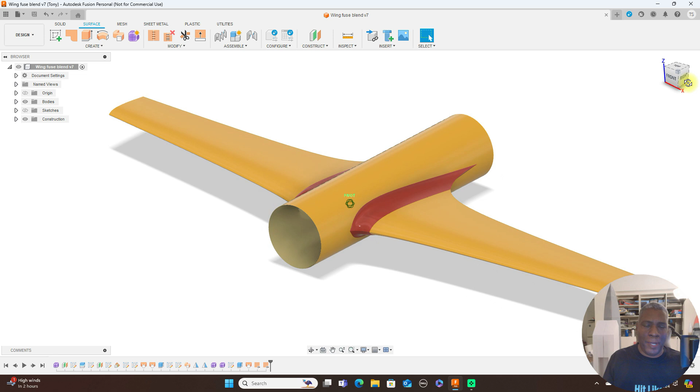Today we're going to be looking at a simple way of making these wing fairings, or how this mates the wings into the fuselage smoothly. The transition, as you can see, the wing comes up and transitions right into that same shape. It's somewhat like a fillet, but it's not a fillet. There are many ways of doing this, but this is probably the easiest way I've seen. As you can see, this looks very nice, the way they butt up like that, the wings to the fuselage.

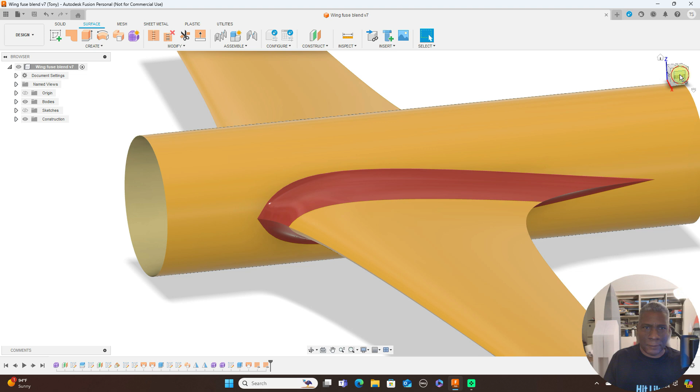Okay, let's go ahead and get started on this. First I'm going to do a new design, and make a mock fuselage here, using a cylinder on this plane.

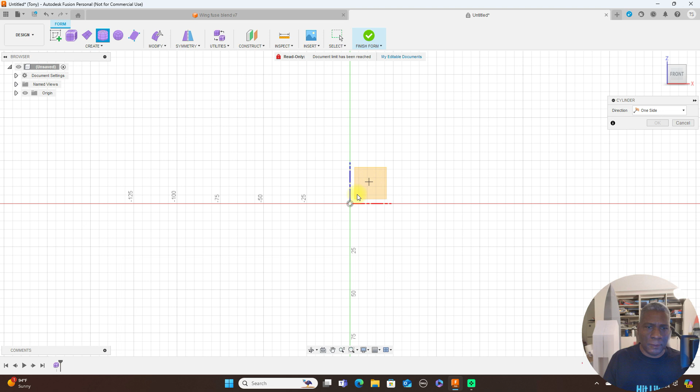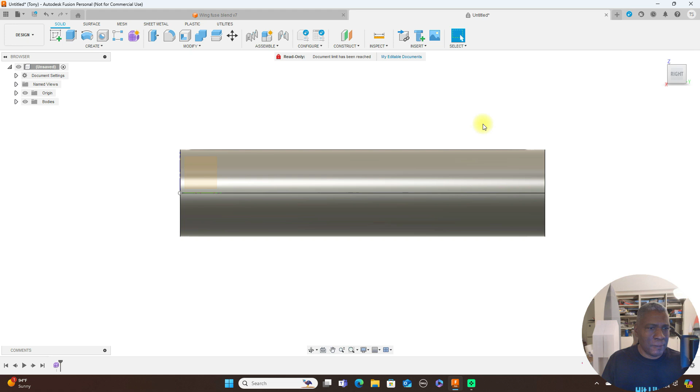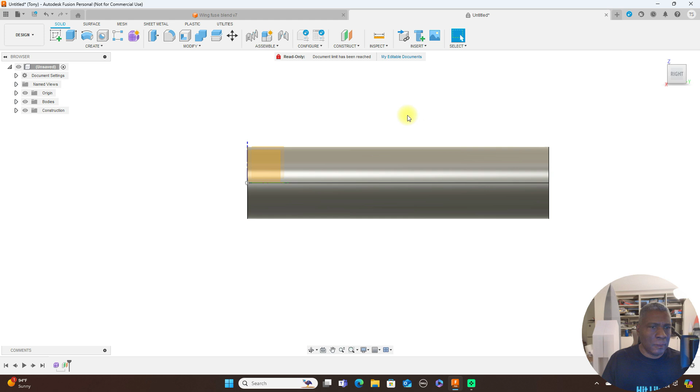Okay, we have our so-called fuselage here. Now I'm going to do an offset plane, and click OK. I want to create a sketch on this plane, so I click that plane and create sketch.

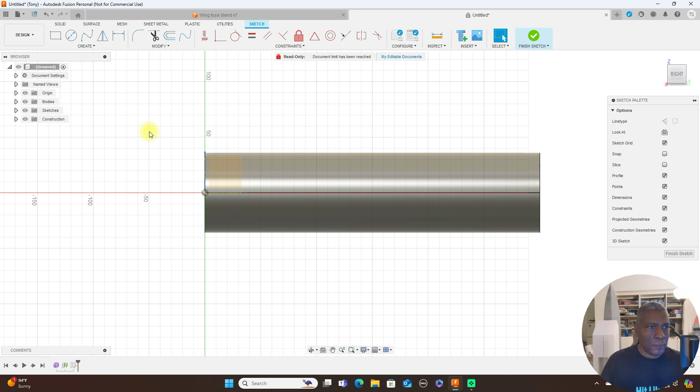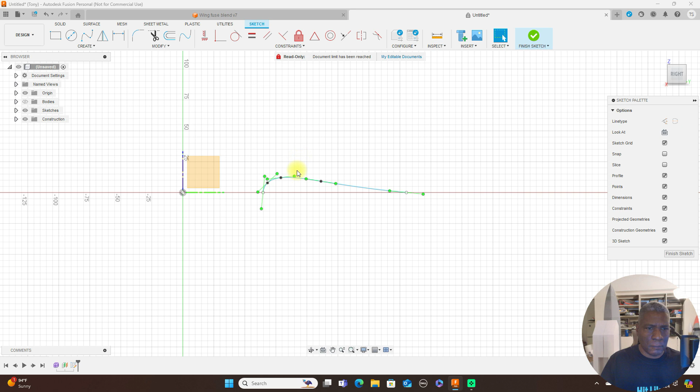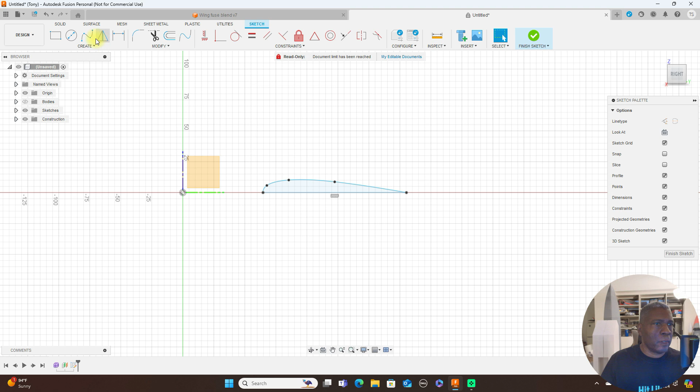Now I'm going to draw an arbitrary airfoil. If you have an airfoil that you want to use, you would just put it on the canvas onto this plane and then trace it. But here's just an arbitrary one. Okay, and just mirror this, click OK and finish sketch. That's our arbitrary airfoil there.

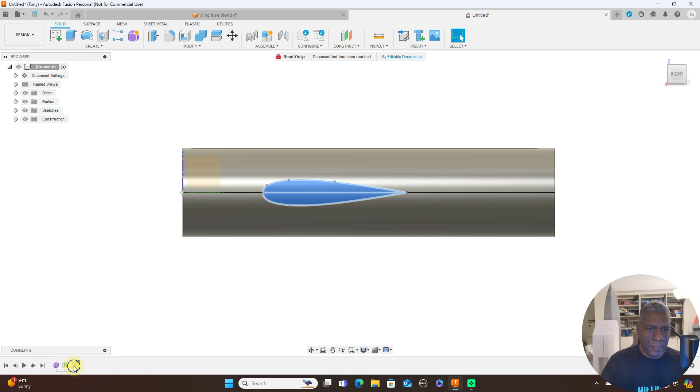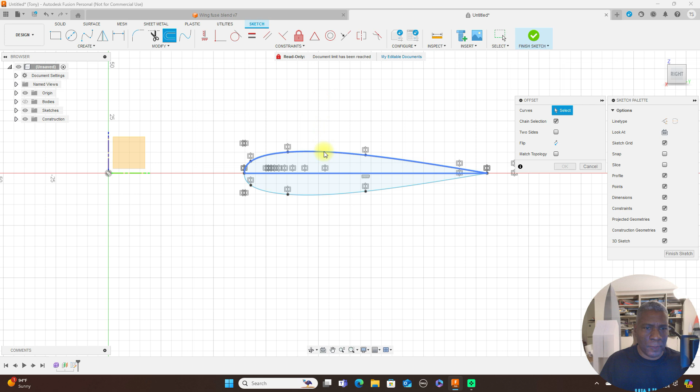What I'm going to do now is come back and edit this sketch, turn this body off again. So once you draw the airfoil, just leave the sketch open. Then I'm going to use an offset, but first I'll delete this line here, then use an offset.

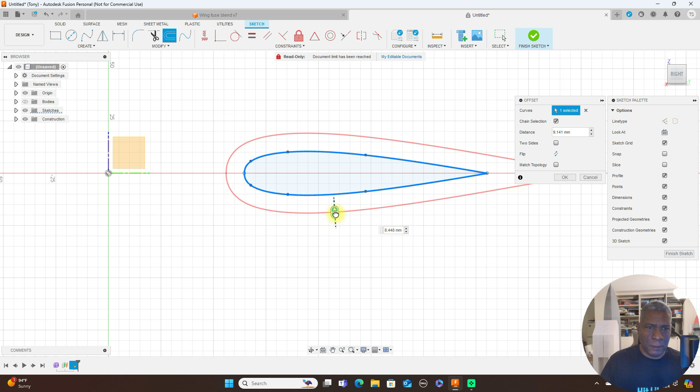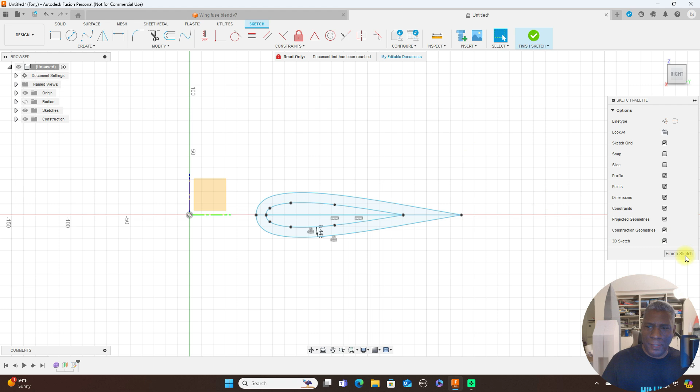This and this. Make that bigger and click OK. I can put my line back if I want. Okay, now we have that, go ahead and finish sketch, and turn the body back on.

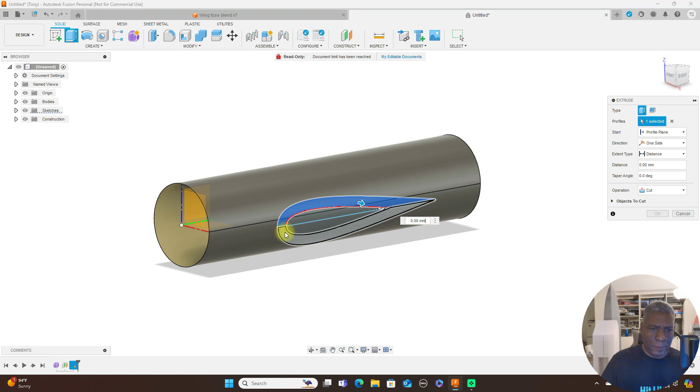Now I'm going to use extrude, and extrude cut. I want to use this profile and this profile. Drag that in, and click OK.

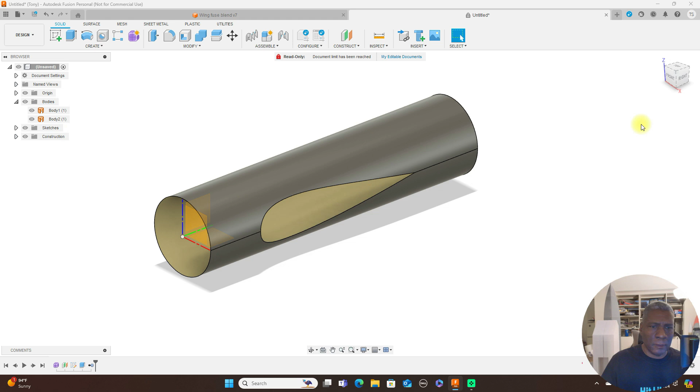And this here, just remove it, and this other one over here, remove it as well. You don't want to delete them because you might want to come back and use those pieces again for something. If you use remove, it just removes it from the tree up here, and if you want to bring them back, just come down here. Okay, turn the sketches back on that I need to see.

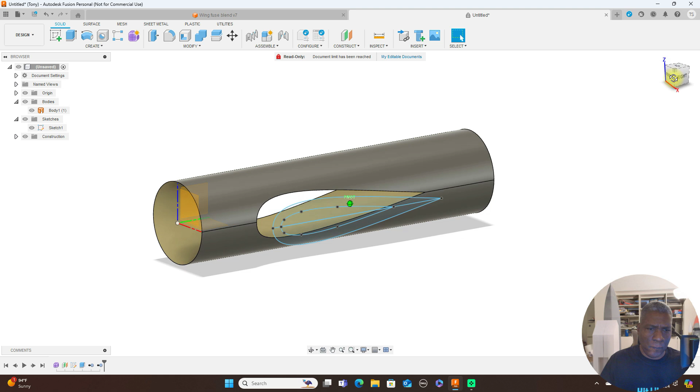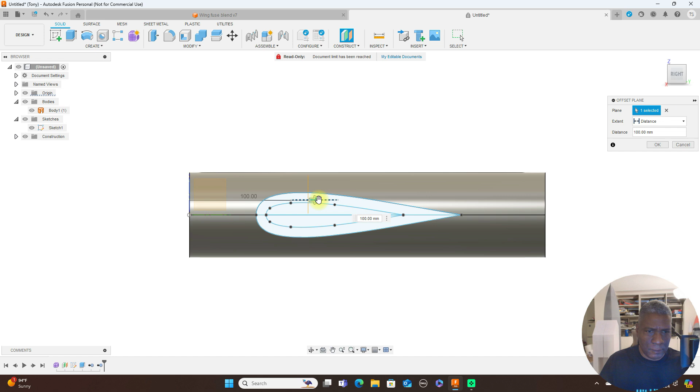Now, you don't have to do this, but I like doing it because sometimes when I try to use my fit point spline, it gets all wonky. So I like to do this: use an offset plane, and click OK.

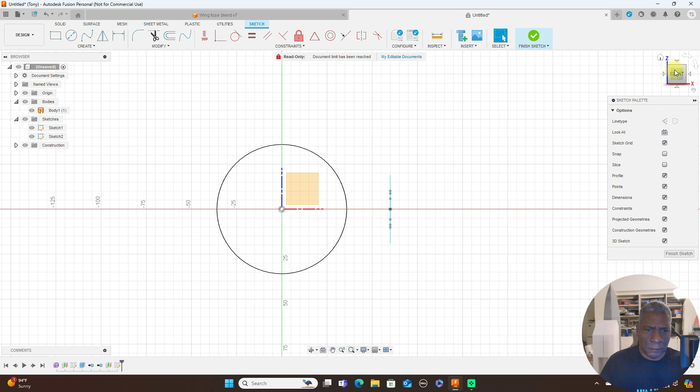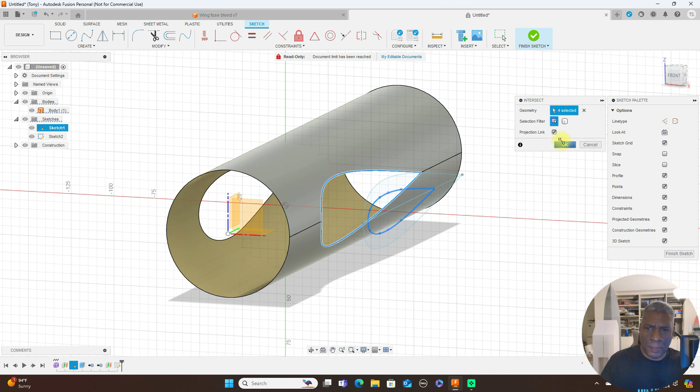I want to create a sketch on this plane here, and create sketch. Intersect, and the geometry I want to intersect is this, and click OK. Now we have our points here.

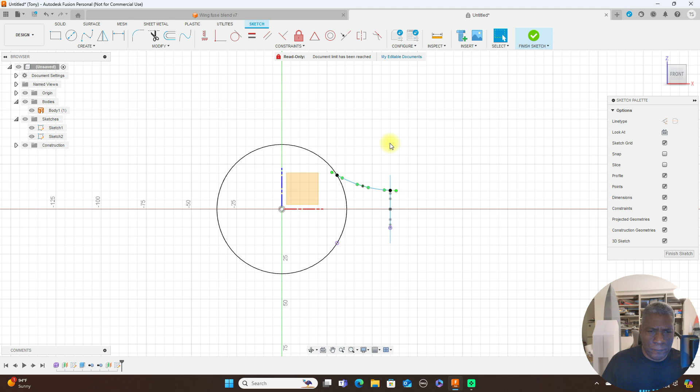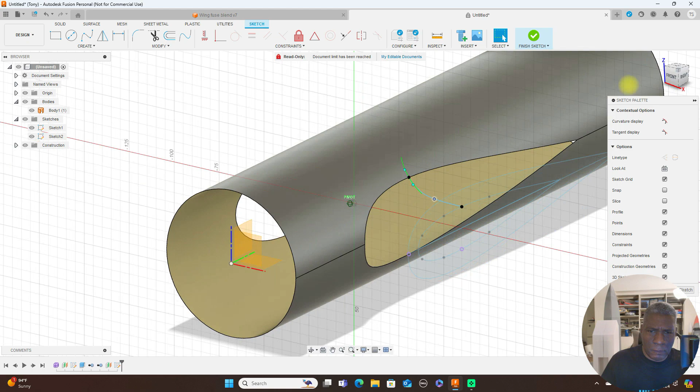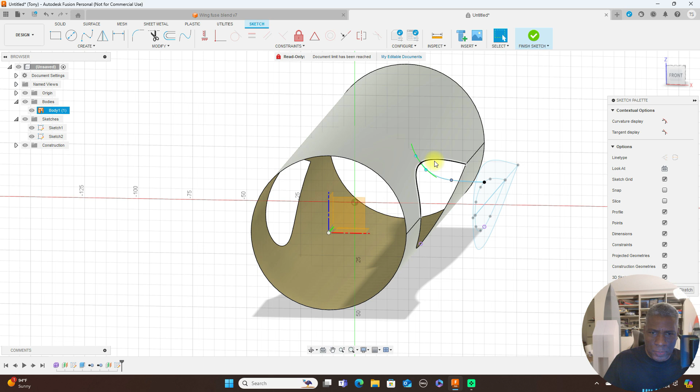Now, fit point spline, snap it there. This just adds a control point here for this curve. When you loft these two together, this profile with this profile, you can make it a G0, G1, or G2. By putting this control point in here, you have a little control over it, but like I said, you really don't have to do this, it's up to you.

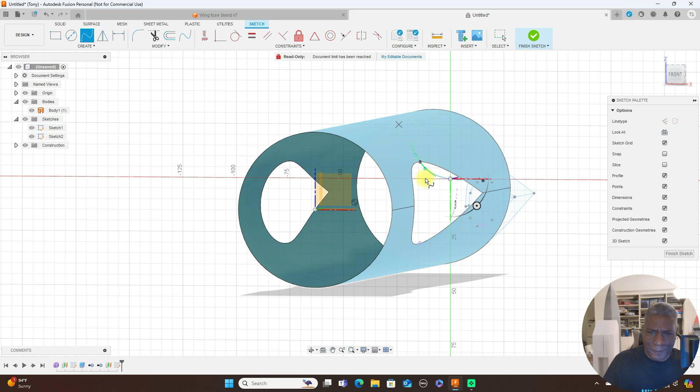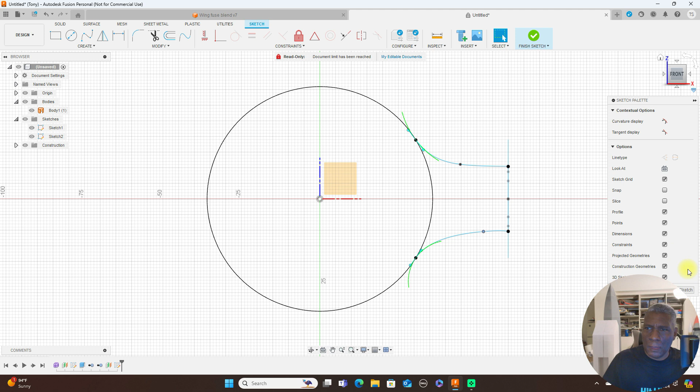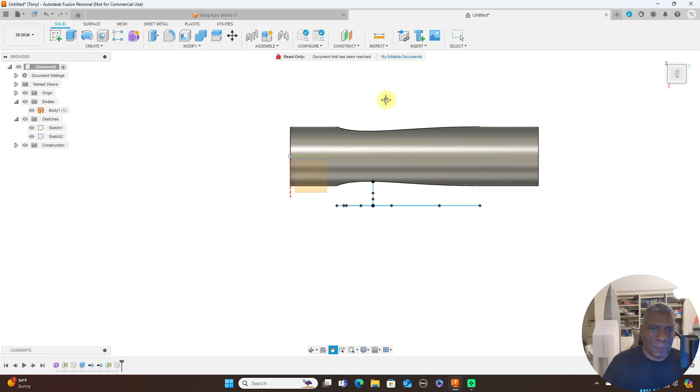Get this from the front again. Go ahead, finish sketch. Look at this from the top. Now I want to create a sketch on this plane.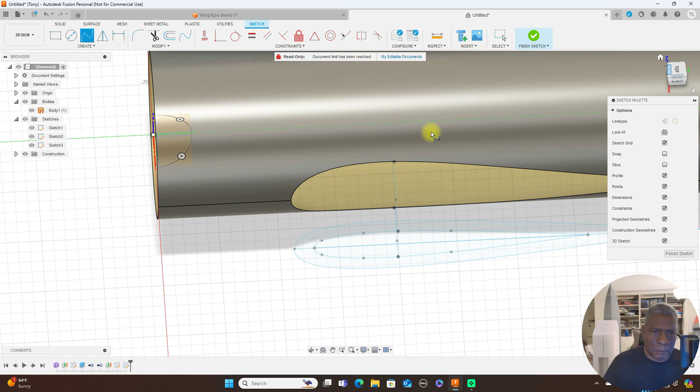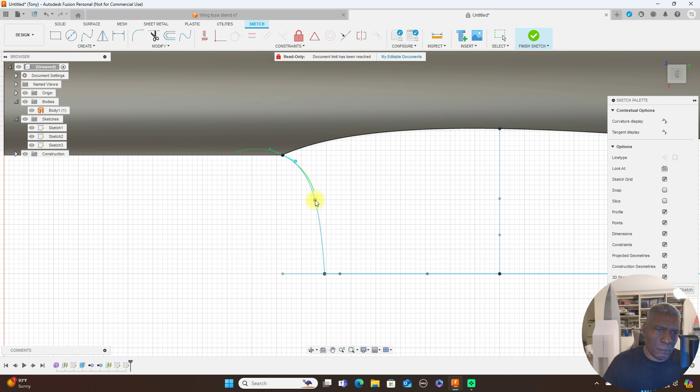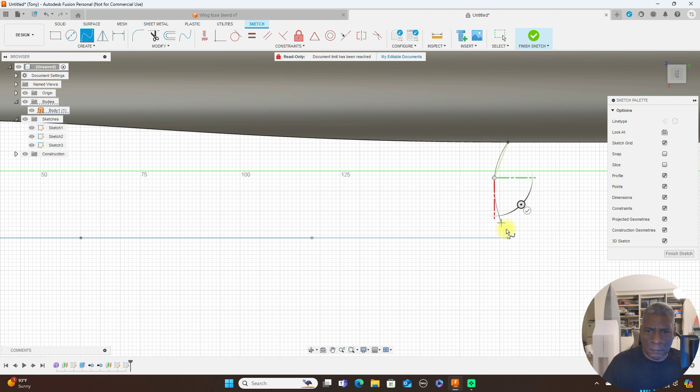Fit point spline. Okay, you can do that. Then the back here. And that's probably on the wrong line, which it is, so I'll delete this and do that again, making sure to get it on the right line.

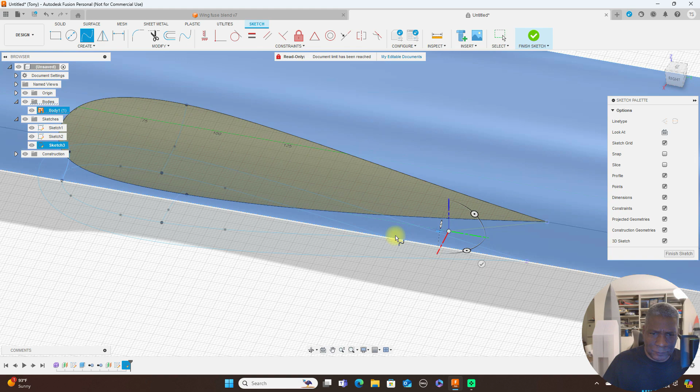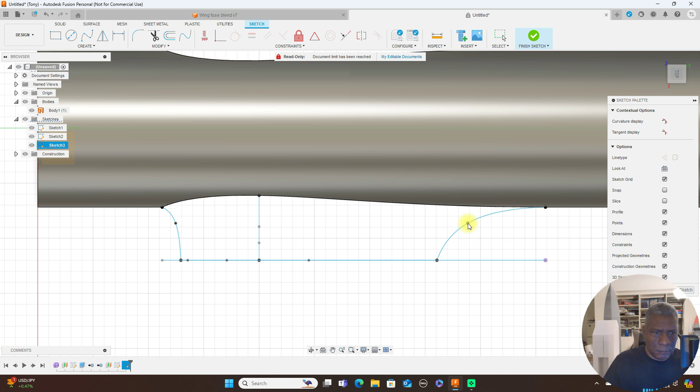Look at this from the top. It locked onto there, let's unlock that, then move this down. Go ahead and finish sketch.

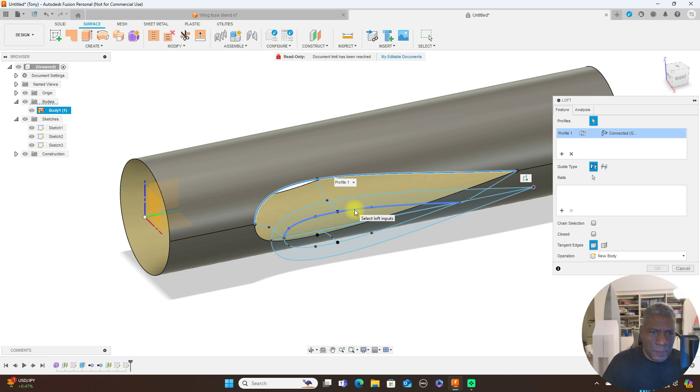Then surface, and we're going to loft, this to this. Then we can add our guide rails.

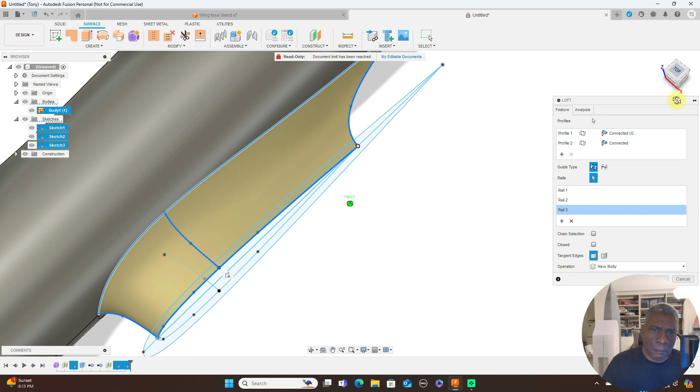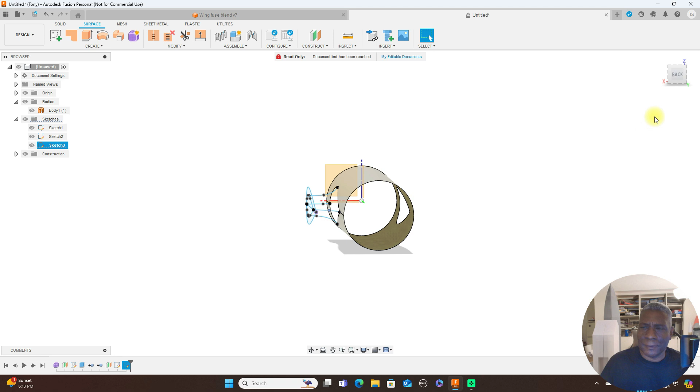Go ahead and cancel this for a second. As you can see, that back is not up, so I'll just move this up. And we have that. Now I'll do that again.

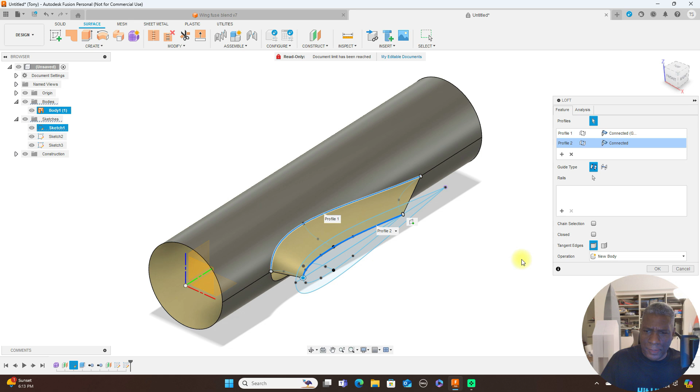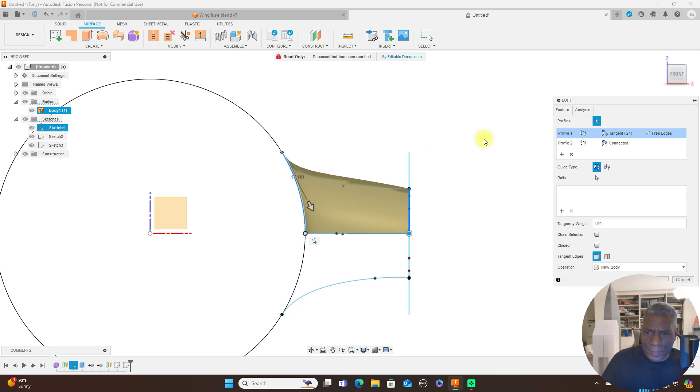Now let's just say we lofted this line to this line and didn't use any guide rails, we just did that. Now you see here how this goes into here. Now that's G1 there, how that runs into there like that. And if you can see, when I drew this line here, that's somewhat of a G1 line that I control, but this is a G1 curve here and blends into here.

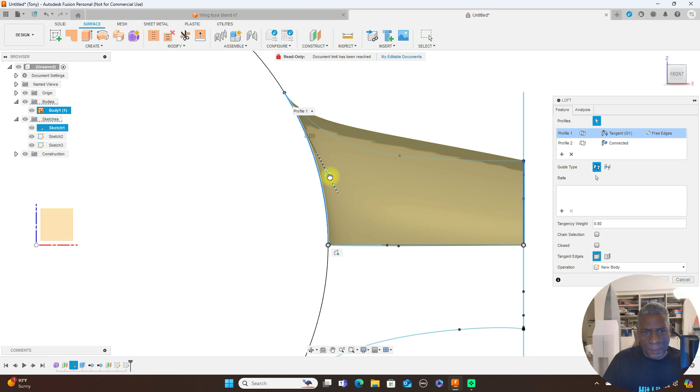So this is what you want, this G1 right here. So if you didn't draw this guide rail in here like I did, you could still get decent results using that, like this. And that's good too, as you can see. There's nothing wrong with doing it that way too.

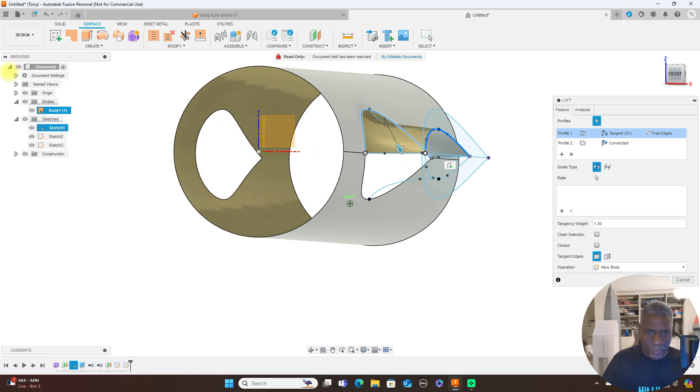Like I said before, you didn't have to put the guide rails in here, but I just like putting guide rails in to get more control. Now I'll go ahead and click OK here, and then we loft the bottom of it also, so this to this.

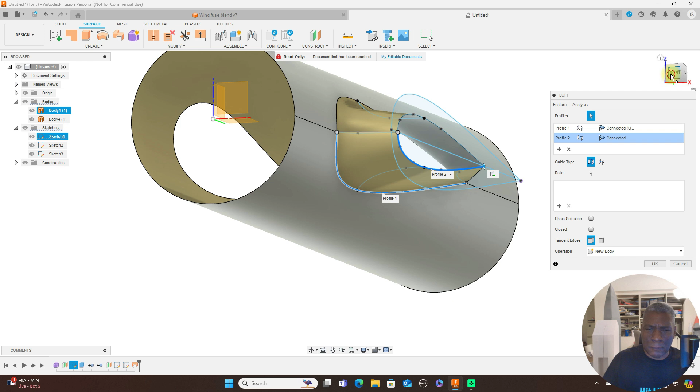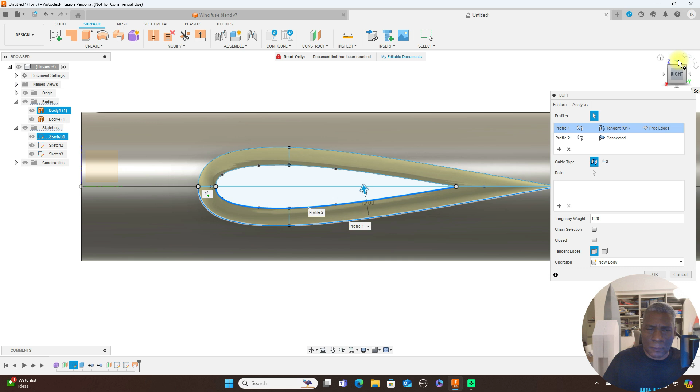And what we want to do here, give it that G1 also. And then you adjust it. Go ahead and click OK. Turn these sketches off. And there you have that nice blend in there like that. And this is G1.

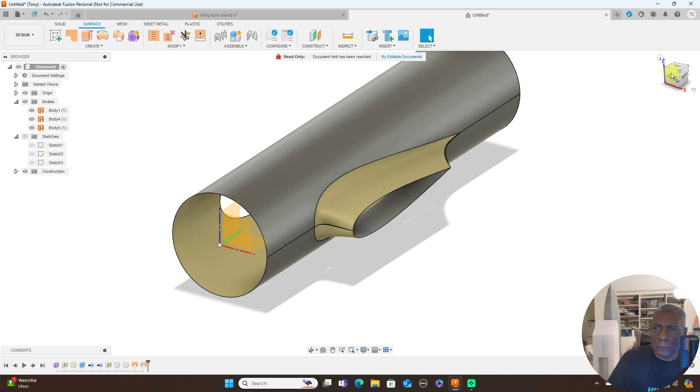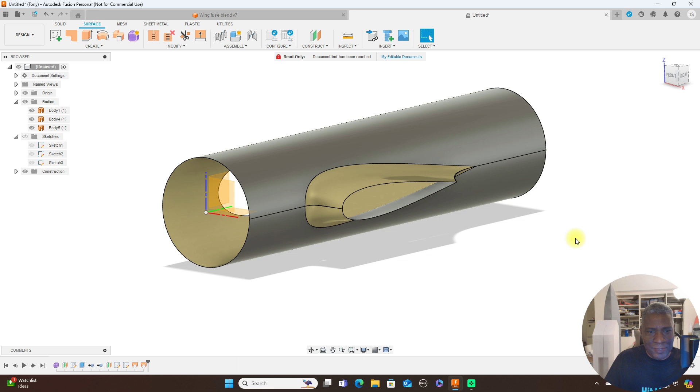And for those of you wondering how to change this color here, because if you left it like this, it's somewhat inside-outside. So if you want to change the color to this, you can only change this grayish looking color, you can't change this other color. So let's say I wanted this to be yellow, and I wanted this to be yellow too. If I click here and move this here, it's not yellow.

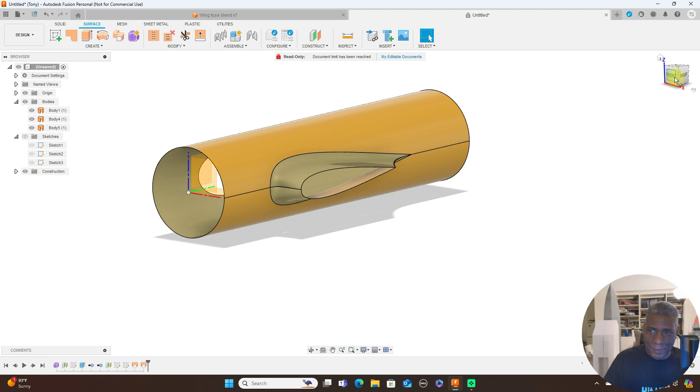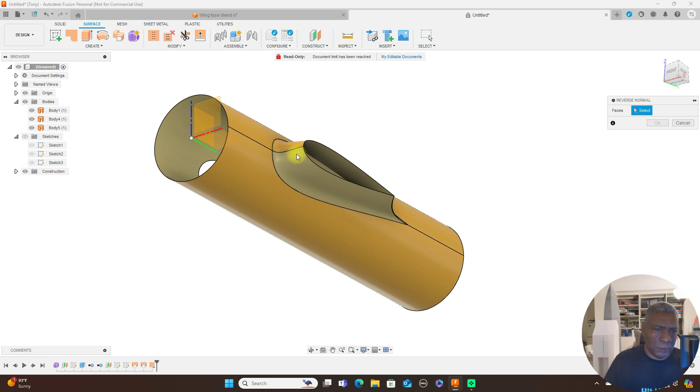Let's go and close this. As you can see, the yellow is on the inside and not the outside like you want it to be. So to change these, you come up here to Modify, go to Reverse Normal, click this, click OK. And same thing with the bottom: Modify, Reverse Normal, click this, and click OK.

And sometimes that will reverse on you when you do sweeps or lofts like that. And then if we turn off the lines, which is Control 4, as you can see, that's really smooth.

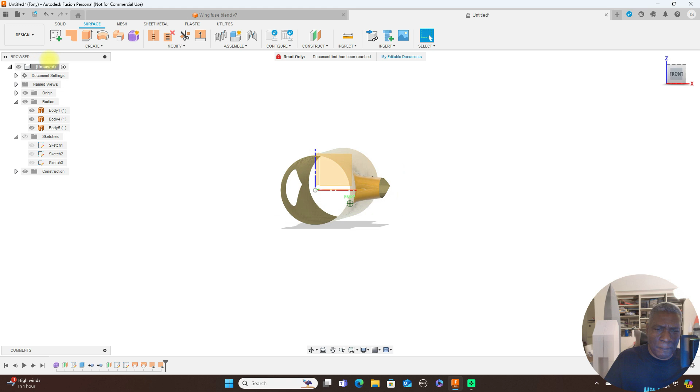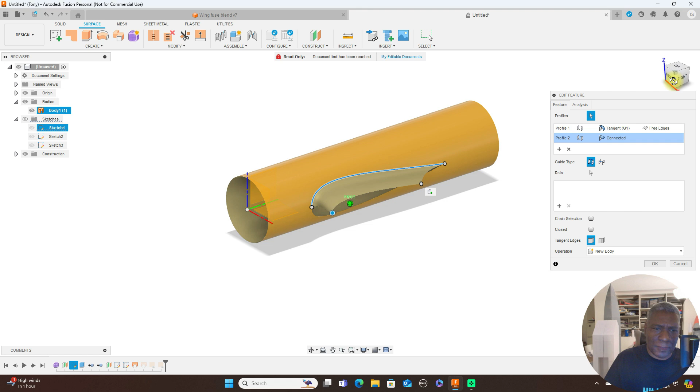Now, if you notice, we have this little dent sort of thing in here. So I'm going to go back to the loft, first loft, edit, turn my sketches back on. It's by adding a guide rail here, but it won't let me do that.

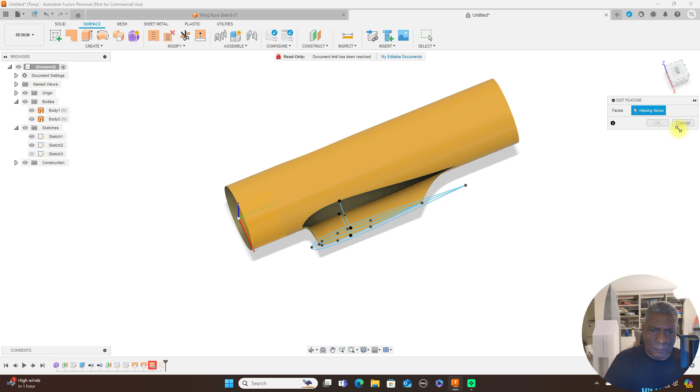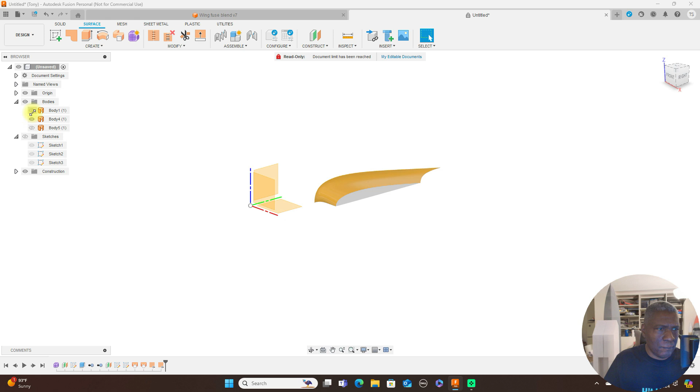So this time, let's say we turn all this off, turn the sketches on. Now I'm going to loft this and use the control. So now loft this to this and use the rails.

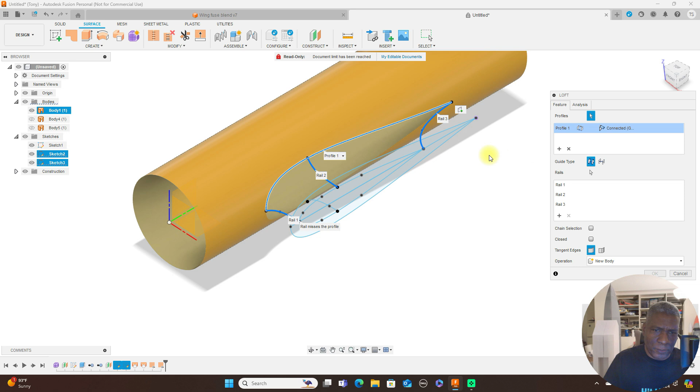Oops, went to the wrong one. It's this one. And click OK. And now do that loft again for the bottom, this and this. And use the guide rail.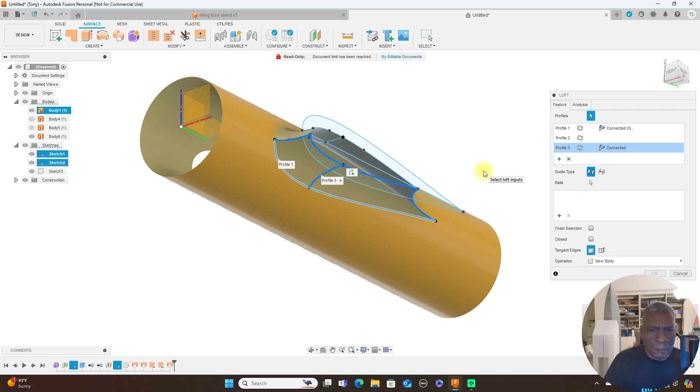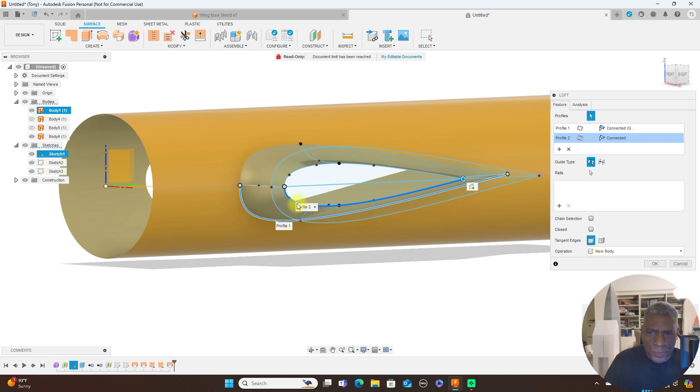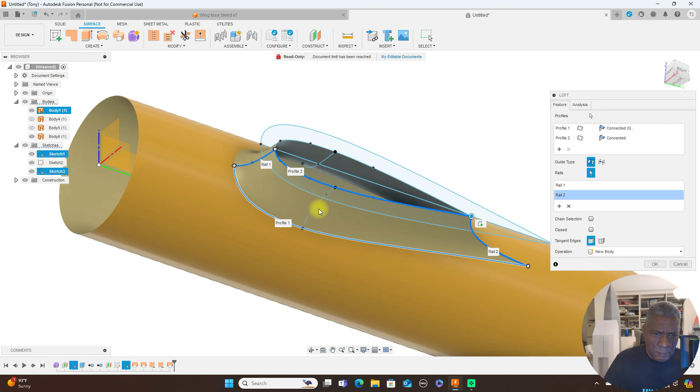Let me change something here. Okay, do this again. That to that. Now add guide rails. And click OK. Turn the sketches off.

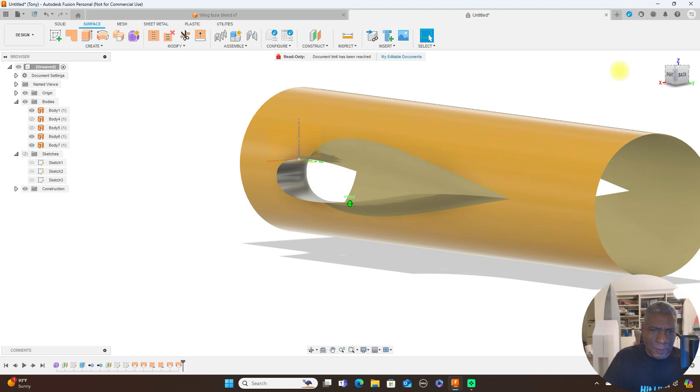And this is it, using the guide rails. To me, using the guide rails like I wanted it, I was able to control the shape more, which gives me a smoother connection going in like that to the fuselage. As you can see, it comes up nice and goes around like that.

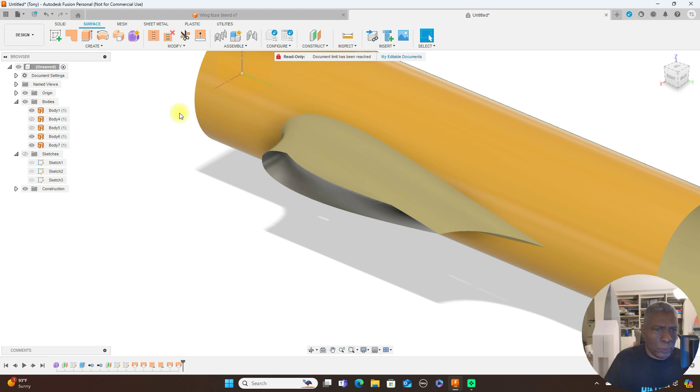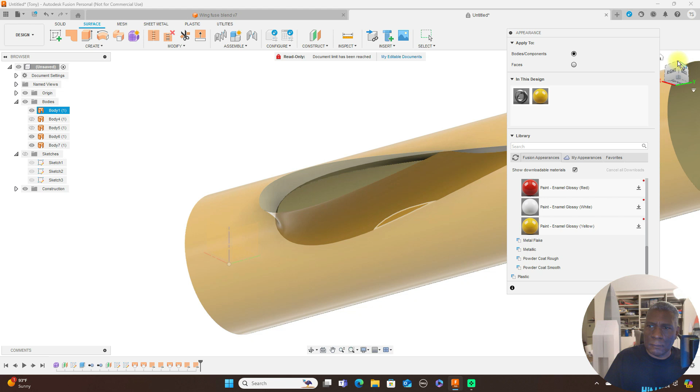And we change the colors here. We'll first use the Reverse Normal, change this, and the bottom one also. Then change the appearance. Okay, and there we have that.

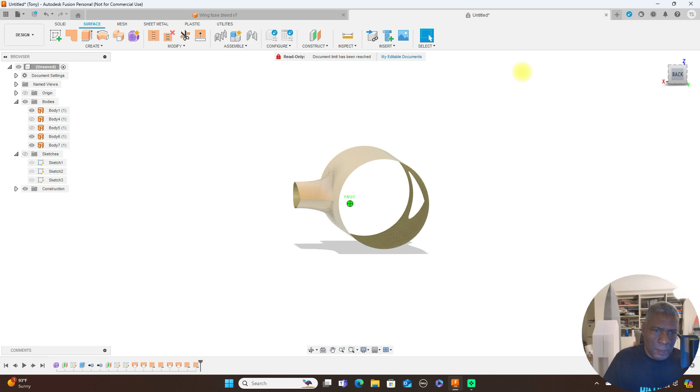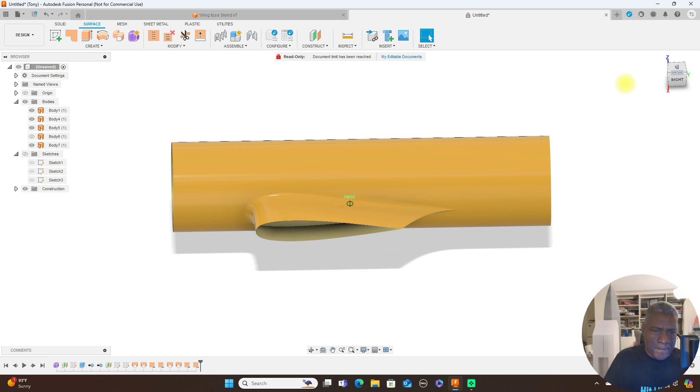And I think that blend looks a little better. Turn that off, turn these two off, and turn these two back on. Now this is the first one where I didn't have any control rails. But when you have your blueprints in here, you want to draw those control rails the same shape as your wing, how it blends into the fuselage.

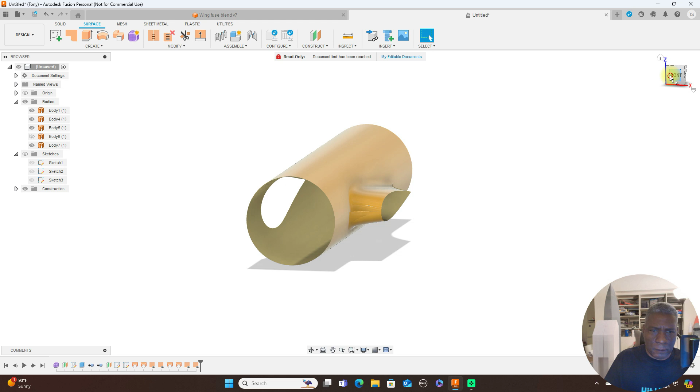And these are G1s. And how that blends in just nice and smooth.

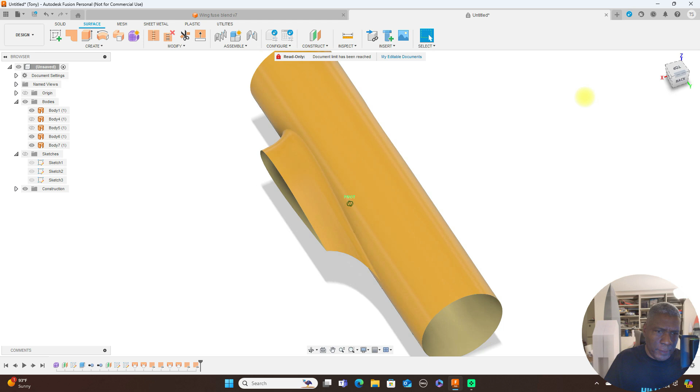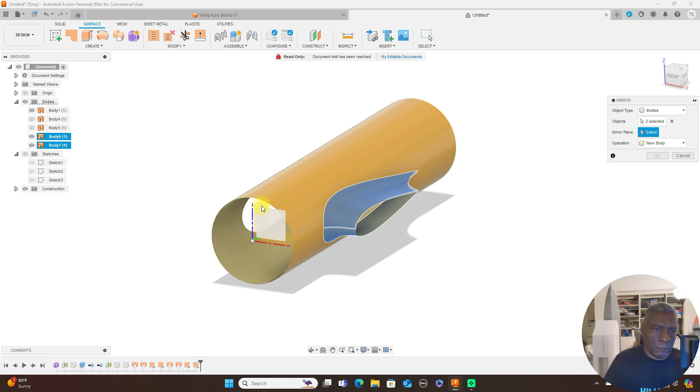And we can mirror this stuff too. Okay, and we have that. And that's how you get that nice, smooth transition using G1 into the fuselage. Like I said, like you can see here, this G1 nice transition around here.

Well, anyway, that's going to do it for this video.